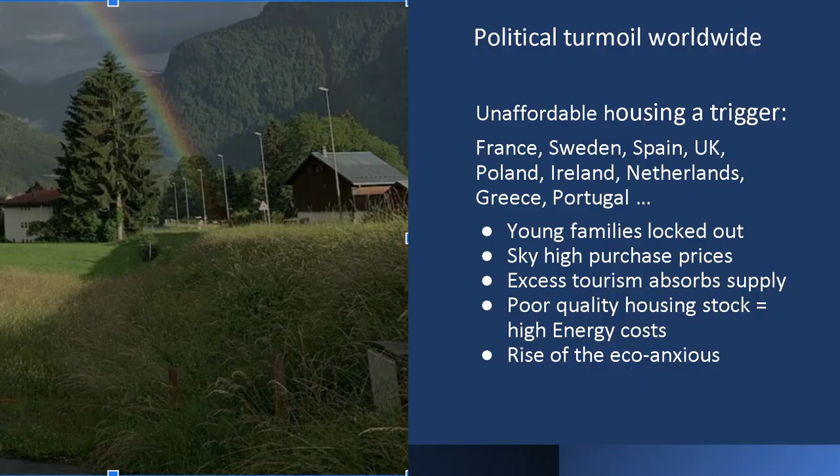So in that landscape, we bought this little house in the middle of this beautiful space in Haute-Savoie, halfway between Chamonix and Geneva. Extremely affordable because it's in a natural off-grid location where there's no other building allowed. This is the town, Samoëns, in France, where down at the bottom, where the town is, it's kind of mega crazy prices, 1 to 5 million euro for a house.

So none of the local people can stay there. Their children can't remain there. They have to commute 30 kilometers in to the village where they were born because expatriates are buying ski chalets. They're sticking in big-ass oil tanks. They're consuming 3, 4, 5, 6 tons of fuel a year, and there's zero appreciation of the damage they're doing, not only to the local environment, but to the planet.

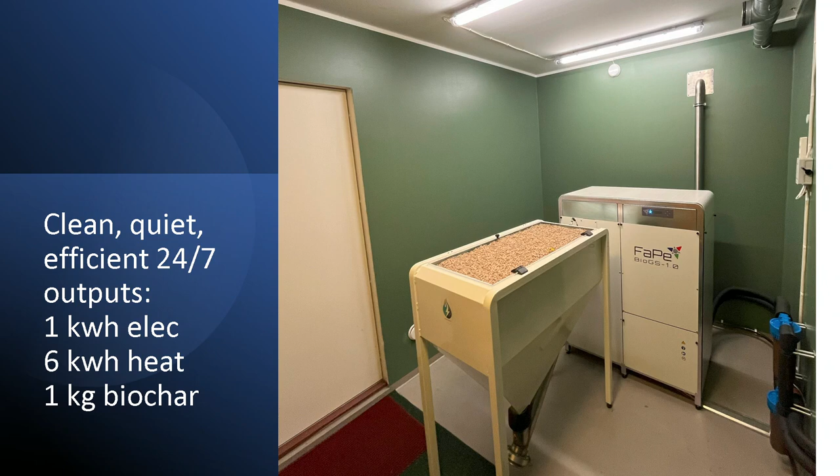So I'll get to the point in a second. This is it. This is a little machine that belongs in the Museum of Modern Art. It's clean, it's quiet, it's inside the house. The exhaust is a plastic pipe. It's quiet as a dishwasher, a noisy dishwasher, but it's still quiet. And it produces 1 kilowatt of electricity per hour, 6 kilowatts of heat, and about 1 kilogram of biochar per hour.

Now, this is the bit I would like you to think about. I'm sure wherever you are from, especially if you're from Europe, there are brownfield sites all over the place. Read any newspaper: the factory's closing down, it's moving to Asia, they're not making this anymore, 1,500 jobs have just been let go. There are brownfield sites everywhere. They might be toxic, they might not be toxic, but the real estate value is infinitesimal. It's a little bit like my field. It's available. The regulations are changing regarding tiny houses. The knowledge is there with passive houses.

It's going to take some thinking out of the box to think about how we can change the equation for these eco-anxious, frustrated people who are going to tear down the house if we don't find a solution for them. Think about solutions like this. Collaborate with municipalities, find the kind of industrial site within range of a city, a town, or a municipality, and get the architects and the builders to get busy and think about on or off-grid generation of power, or a combination.

This system combined with the grid resolves all your peak power problems. So you're actually paying very little for your electricity because you're producing the peak power when you need the peak power, and you're getting the heat all day long, or the cool, as it may happen.

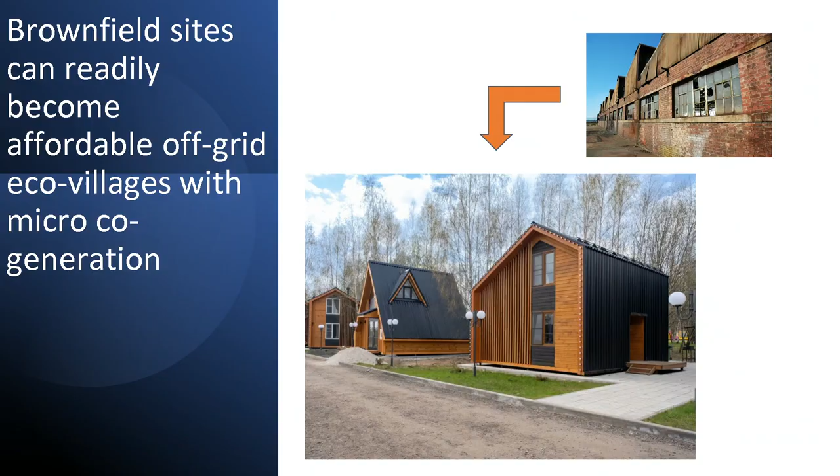Here's a little example of what could happen. So this is the Boekel eco-village in the Netherlands. It's mostly built out. They've just won the SDG awards for sustainable architecture, I think. Sustainable Cities and Communities Award, which is a tough one to get. They won the most sustainable business in the Netherlands award from the Dutch construction industry. Not exactly the friends of the greenies, right? But they voted these guys the most.

So why were they doing it? Because they're talking about affordable social housing with a good biodiversity impact. Now, they don't have the machine we're talking about, but you could imagine with the machine how much more powerful this could be. So it's the dream of municipalities to find homes for the local people which don't turn into ghettos and nasty places and places of crime.

And that's what they're finding: when you create an environment where people can do some gardening, use the biochar, learn about nature, learn about biodiversity, it suddenly turns a corner. So the municipalities are super interested in it. They've changed Dutch legislation to enable these guys to use innovative things that are not quite ready for the market.

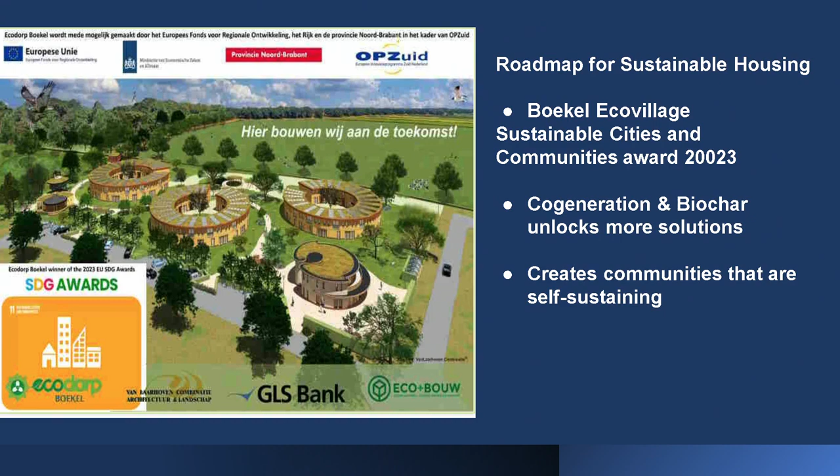So every year we have a festival called the Fête des Possibles. It's in Belgium and France for the moment. It takes the entire month of September, and communities showcase different ways of living. So here we get about 40, 50 guests a year, and we're demonstrating to people the potential of investigating different techniques of being more autonomous. And indeed we are.

And just to conclude, I can tell you as an end user, not a technician, somebody who's had to learn the hard way how to do it properly, that it turns out actually that biochar is the key that we didn't know we needed and that we didn't know we had.

And so it's opened the door to affordability. It's opened the door to maintaining and improving biodiversity. And as we're learning year by year, it's creating extraordinary benefits in soil fertility and growth and potential. And we can see it by the numbers of ordinary people who are coming to our events every year. So this is it. Just want to sort of open that new window to you, if it is a new window. Thank you.

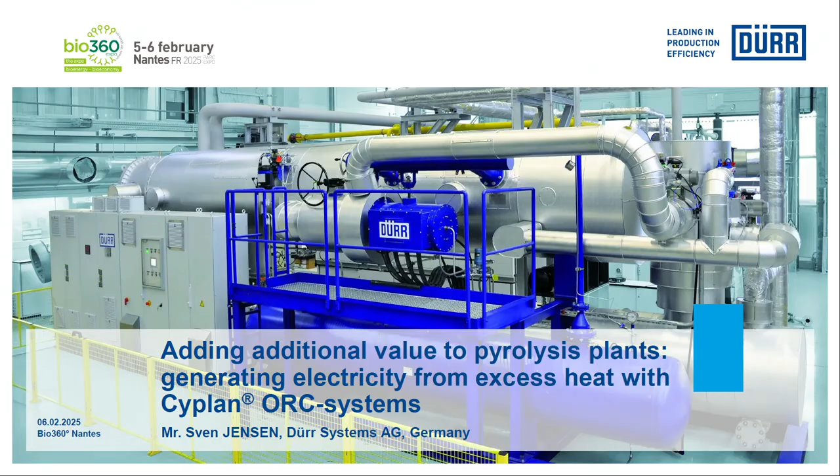So here's a short overview. I will say a few words about the company, then specifically about the technology. That part will be a little bit technical, and then I will specifically share with you how we can apply the technology to the pyrolysis installations, to the pyrolysis industry. In the later part, I have a couple of references, but I'll go over that quickly so you can receive the presentation later and look it up. And at the end, the summary.

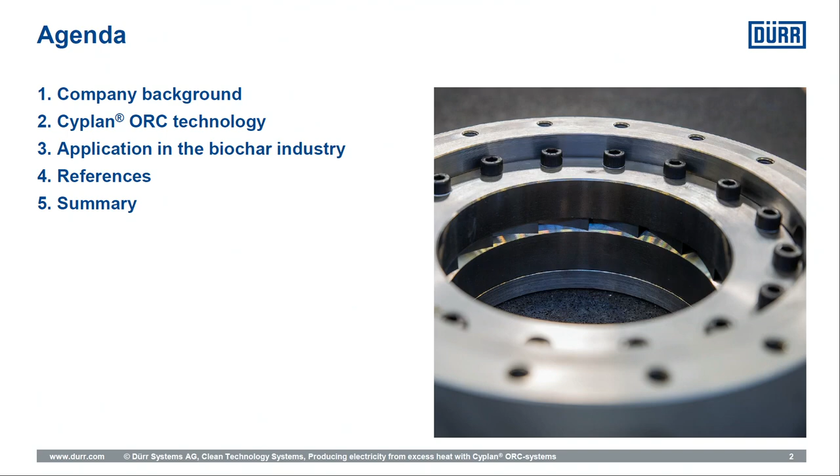The company Dürr is a German-based company in the southern western corner of Germany, in the area of Stuttgart. We are a medium-sized or bigger company, 18,000 employees worldwide, because we do a lot of things. We are a specialized company in machine building and also plant engineering. Here in the middle, framed with a green bar, is the Clean Technology Systems division, and we, with our product Cyplan ORC, are part of that CTS division.

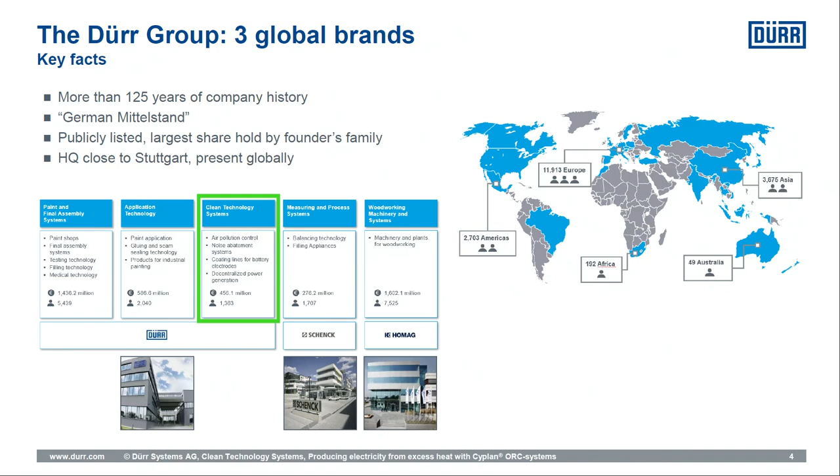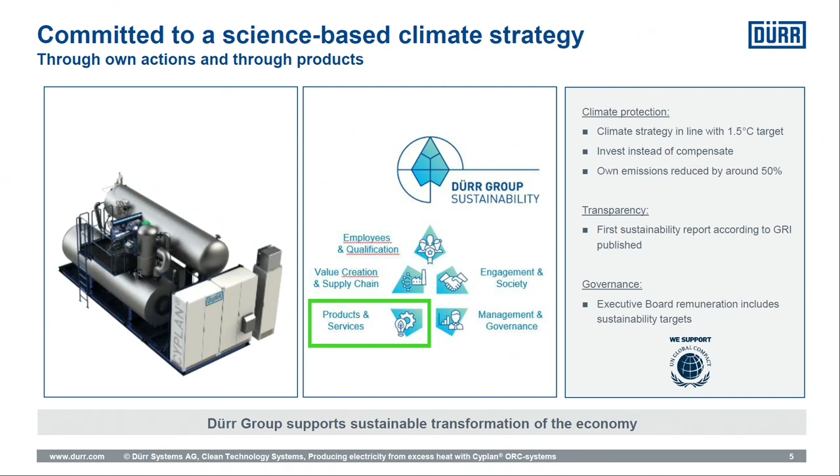Dürr has a big interest in becoming more sustainable. It has a certain policy, and we, with our Cyplan ORC product, are basically an enabler for customers to join this journey of more sustainability.

So what is ORC? ORC stands for Organic Rankine Cycle, and in a nutshell it can be considered similar to a water steam cycle. Technical people among you may know this. This is the cycle that happens in big power plants as well. Thermal energy heats up a media. In big power plants it's just water transforming to steam, and this is sent to a turbine, where in the end electricity is generated.

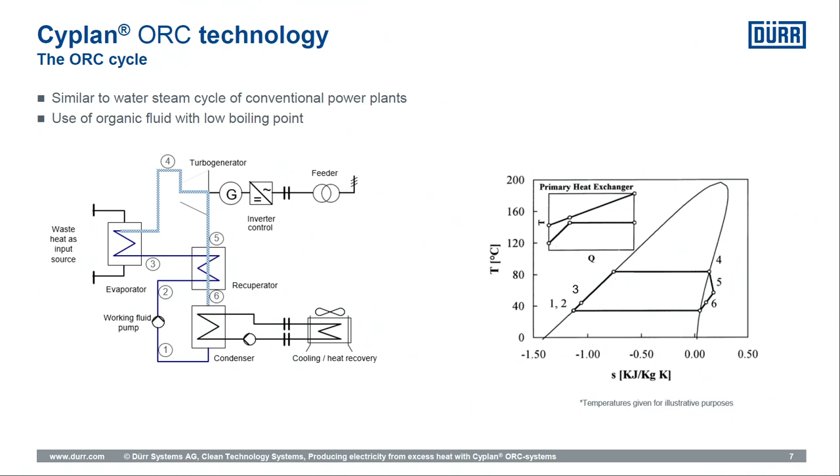We are doing just the same, with the small difference that we are not using water because it has a relatively high boiling point and needs high temperatures. Instead we use organic working media which have a lower boiling point, so we can tap on lower temperatures. But again, relatively the same: we evaporate, we send it to a turbine, this is the place where we generate electricity. Thereafter, we are at low pressure and lower temperature in the ORC media. We need to take out some thermal energy to bring it back into liquid stage, the ORC media, and then close the cycle with a pump. So this is very quickly speaking and explaining what it is about.

The installations, the smaller sizes, look as here in the pictures on the right-hand side - modular units. We try to squeeze everything onto basically the footprint of a 20 or 40 foot container. They are completely assembled in the factory and then sent to the customer and installed there. Because of that, obviously at site there is little cost for installation, and also the commissioning is then quickly done.

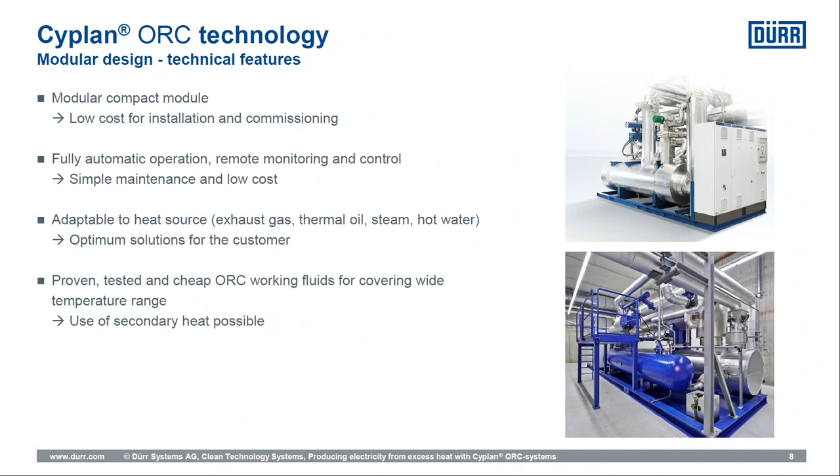We distinguish between high temperature ORC and low temperature ORC. On the left-hand side, from bottom to top, this represents how we receive the energy. When we receive the energy just with hot water, at about 90 degrees or up to 120 degrees, this is the area of low temperature ORC. The cycle is basically the same as explained before.

At the condenser, you have to cool at a maximum low temperature what is possible, and that means most of the times you just have something like a cooling tower or a dry cooler where you push this condensing heat into ambient air at low temperatures, 15 degrees in wintertime, 30 degrees in summer, whatever you can technically establish. When we go to other media, when we receive the heat by means of thermal oil or even hot gas, then we talk about high temperature ORC.

And here we have two differences. Clearly one is the temperature is higher, as is easy to follow. And due to that, we have higher efficiencies in the system itself, roughly double the efficiency compared to low temperature ORC.

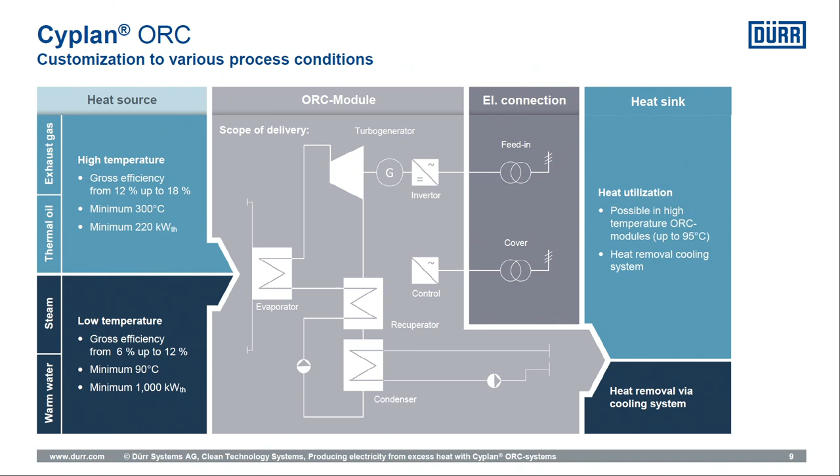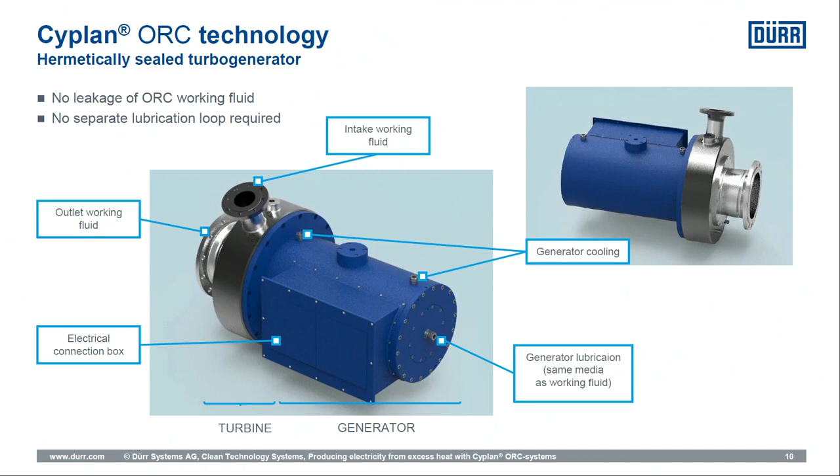At the heart of our technology, there's a turbo generator. I don't want to spend too much words and explanations, only to take with you that this is a hermetically sealed turbo generator, meaning the organic working fluid we use cannot escape, not at this place and not at any other place of the ORC system.

Here is a small picture on the left-hand side. These are the typical sizes we have as modules, so the number stands for the electrical production. 50 kilowatt is the smallest unit, and the 500 kilowatt is the largest transportable unit, in one piece, really the size of a 40-foot container.

When we then talk about the application of the ORC for industry, and clearly not only pyrolysis systems, but it can also be for big industry, steel or any other glass factories, they have a lot of waste heat. Then we are on the right-hand side, and there we rather tailor the ORC solution to the customer needs. So whatever media the heat is available in, we deliver the equipment to catch the heat and then send it to the ORC unit.

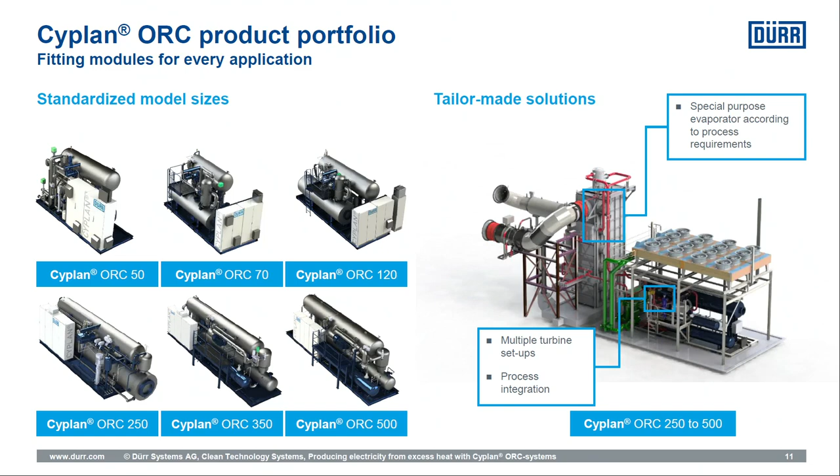So now, what does it mean for the pyrolysis industry or for creating biomass? In this flow sheet, very simple with few boxes, material is received and then sent to the carbonization plant, and then in dotted boxes on the right-hand side is whether there is a filter and gas cleaning equipment or not, depending on the mode of the pyrolysis. In the end, the exhaust gases go to a stack.

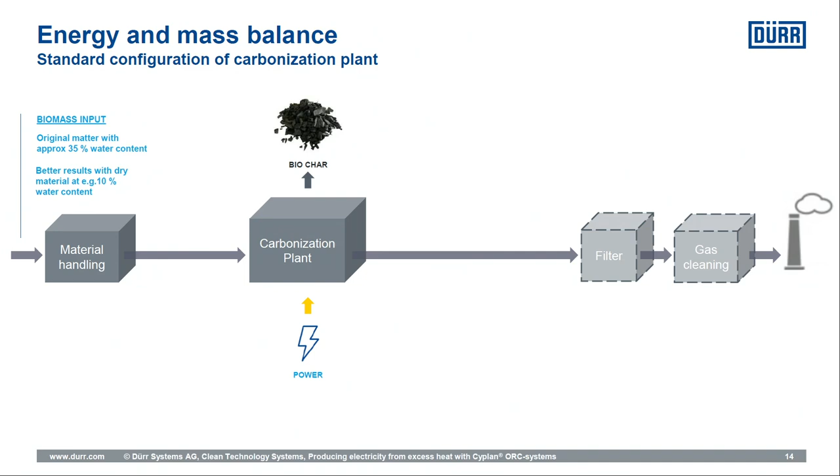I've developed this example on the basis that we receive biomass, so wood chips in this case, with a water content of roughly 35%. However, most or many of the pyrolysis plants work better if there is a lower moisture content in the biomass received or introduced into the reactor. So if desired, there must be a kind of drying system in between.

The ORC typically is then at the tail end. So after the pyrolysis and the combustion of the syngases, we have a hot flue gas, and this is exactly where we want to place the ORC unit. We take the hot gases directly into the primary heat exchanger and run the cycle as explained before.

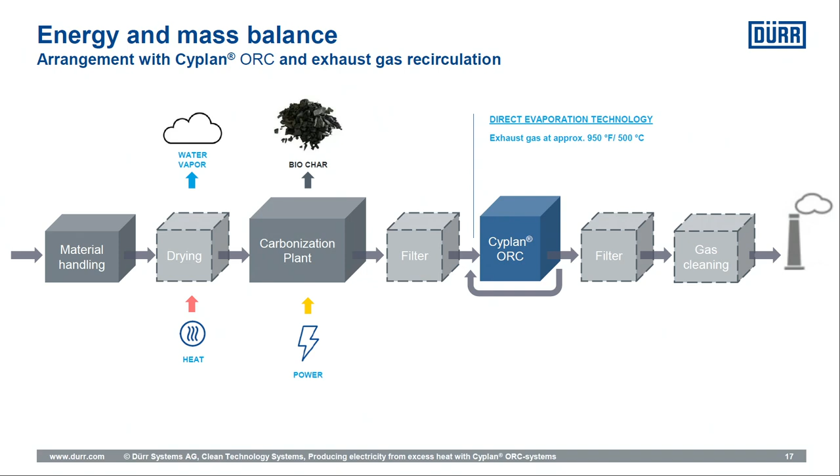So what we do is we produce the electricity again as explained, and by this rough example, with this input or a typical plant, the plant itself from beginning to end consumes roughly 30% of the electricity we generate. So the remainder, 70%, is basically free for use, for any neighbor who is there, or for sell to the grid.

Similarly, as I explained before, we can run the ORC as a combined heat and power unit. So we have this secondary heat, and part of that we funnel back to the drying unit. In that sense, we really close the cycle and make it a very integrated system, using the temperature up to 90-95 degrees for drying the feedstock in the front.

And again, clearly depending on the water content of the feedstock, there is still temperature or thermal energy in surplus, roundabout in the range of 50 to 70%, which again can be used externally or sold to any district heating network.

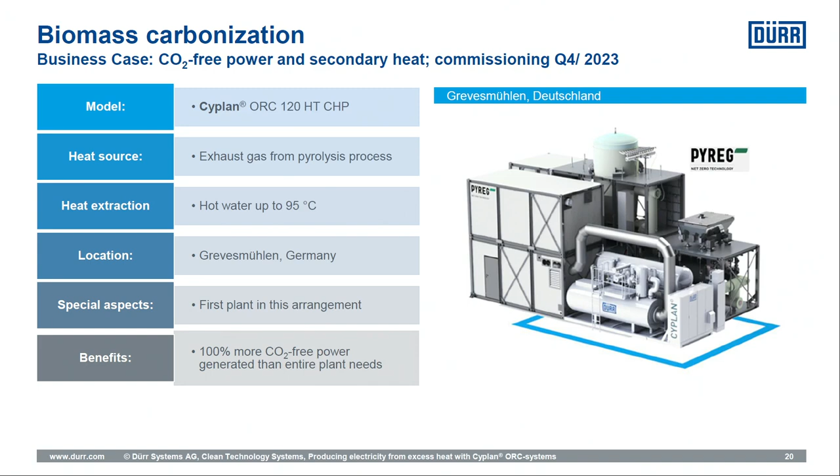So we are lucky that we could already convince some of the pyrolysis producers. We have a project together with the company PYREG. It has been installed in Germany, in the north, and running for roughly 1.5 years. So 2 lines where we have added an ORC 120 to a PYREG 1500.

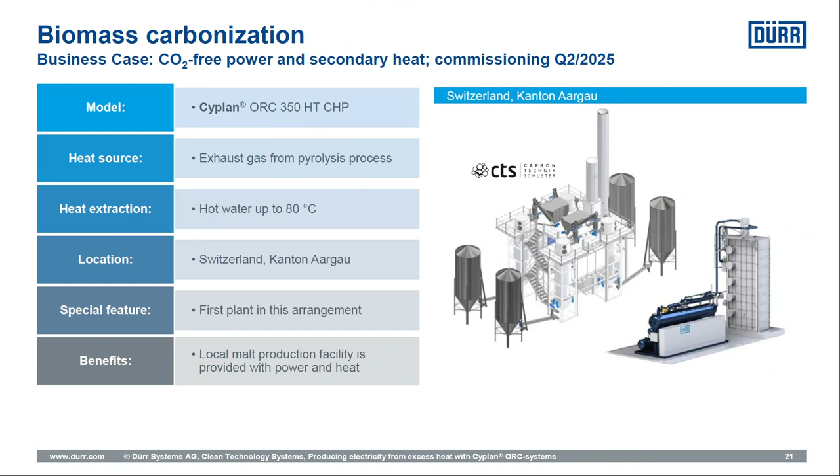Then another German manufacturer, CTS Schuster, is building a plant in Switzerland, a bigger unit with different technology. Here we also have a bigger unit, which looks more like the illustrated picture on the lower right-hand side. This is the ORC composed of a standing evaporator and the ORC base module, but the concept is the same. We take the hot flue gases.

Then we are working on a project in the USA. Due to certain circumstances, it's becoming more and more interesting for US producers to take care of their waste heat. So we are very lucky and proud. This unit is in the final stage of being manufactured here in Germany and then shipped over in the month of May.

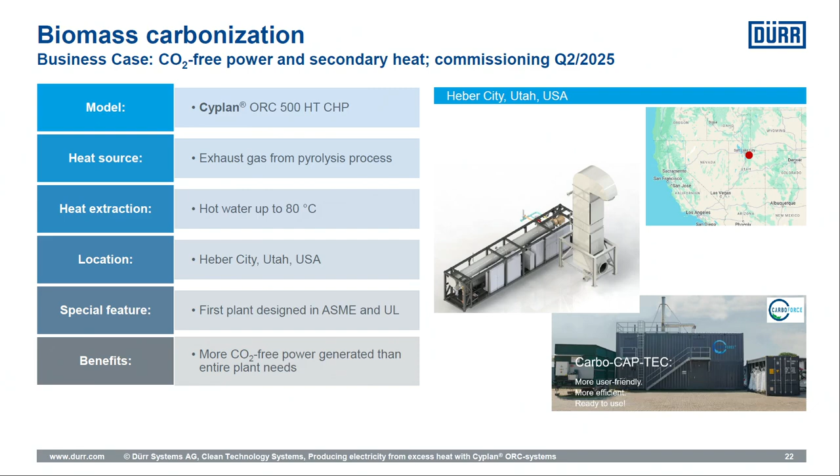And then another one, again with a partner I forgot to mention earlier - the project in the US is with the German company Carboforce. Finally, the 4th project, which is very close, is with the company NGE, also present here, again in Switzerland. Different technology on their side, adaptation on our side, but the concept is basically always the same or similar.

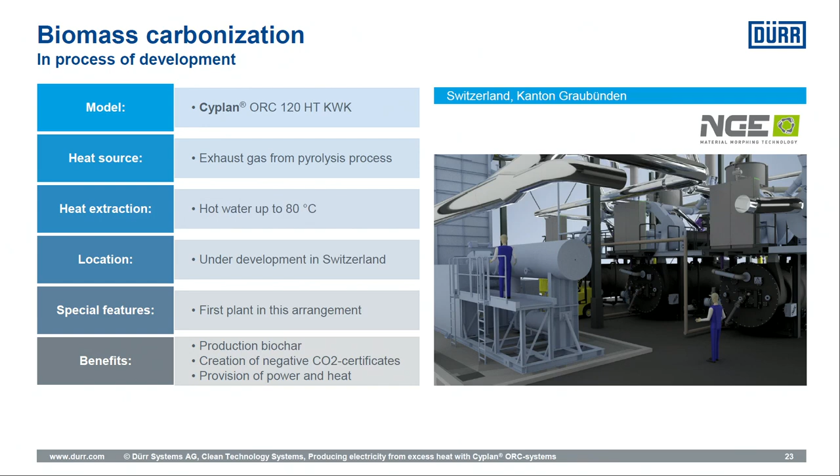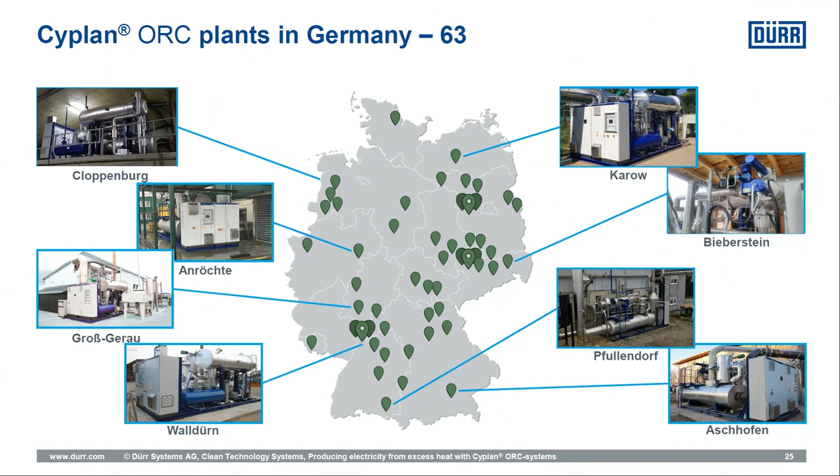Thank you. So here are some more references. Overall, clearly we are a German company, and most of our installations are in Germany. But we also have a couple of installations outside of Germany, worldwide, where for certain reasons we could convince the customer to pick us.

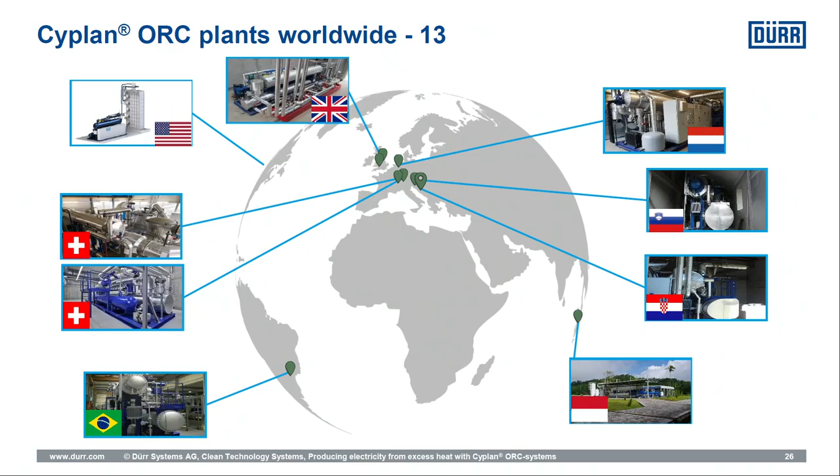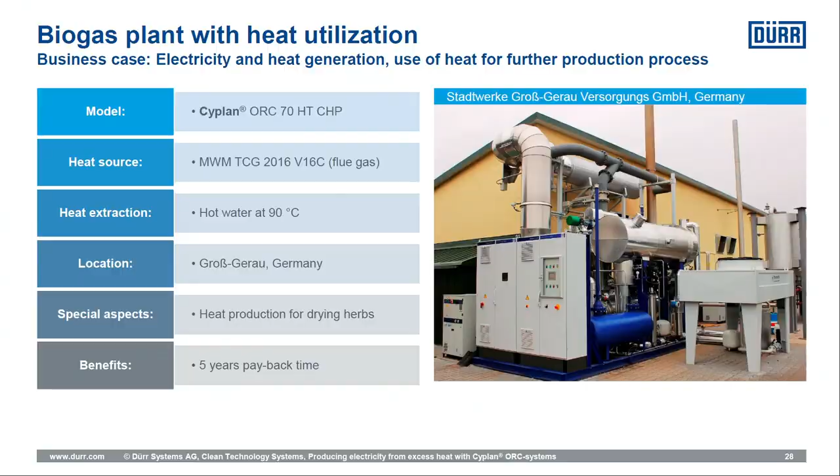Then here are more pictures, I'll flip through quickly. We have a lot of installations in the biogas sector, which might be interesting for other people here in the back of the hall who aren't sitting here. Also larger units where we have the transfer with thermal oil, when there's a boiler, just a biomass boiler, heating up the thermal oil, and we receive it at a temperature of 300 degrees, for example.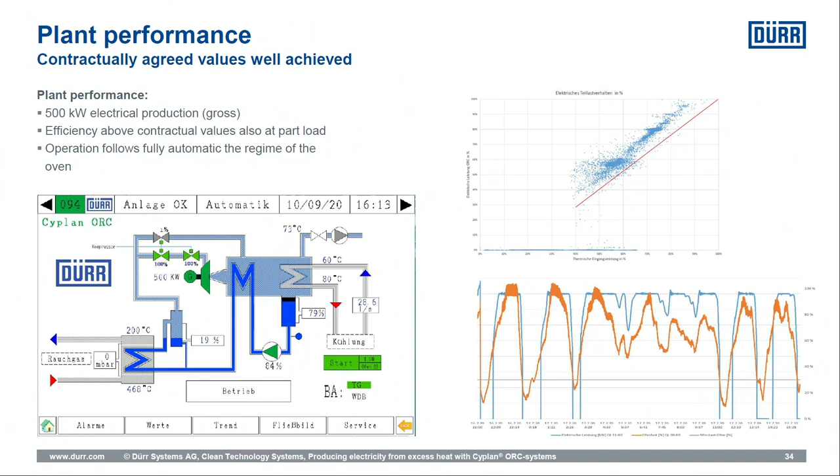Right, then I'm at the end. Just a short summary - what are the big benefits of the ORC? You can produce electricity on site, CO2-free electricity, because the CO2 burden is not connected to the waste heat and therefore not to the electricity.

I didn't talk about that point a lot, but we are using natural hydrocarbons as ORC working media, so no refrigerants. That means we have a low GWP, global warming potential, and also we think we are safe for whatever development might come in relation to regulation of refrigerants.

Yeah, clearly with the electricity generated, you don't need to buy it from the grid, so this is the main point of saving. In case of the pyrolysis plants, of course, as well, the electricity is CO2 free. If you buy the electricity from the grid, there's a certain CO2 package coming with it, and normally with the certification process you need to deduct. So whatever you have spent in CO2 for your production or for carrying the biomass to your plant, and with producing your own CO2-free electricity, you basically can increase or improve your case here.

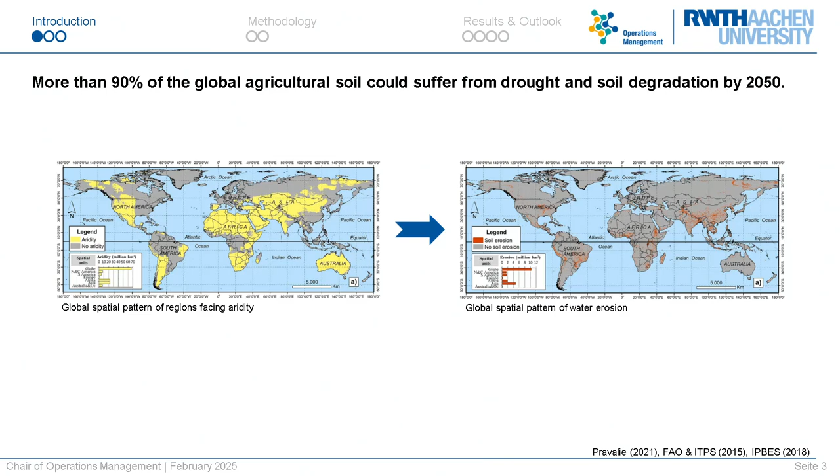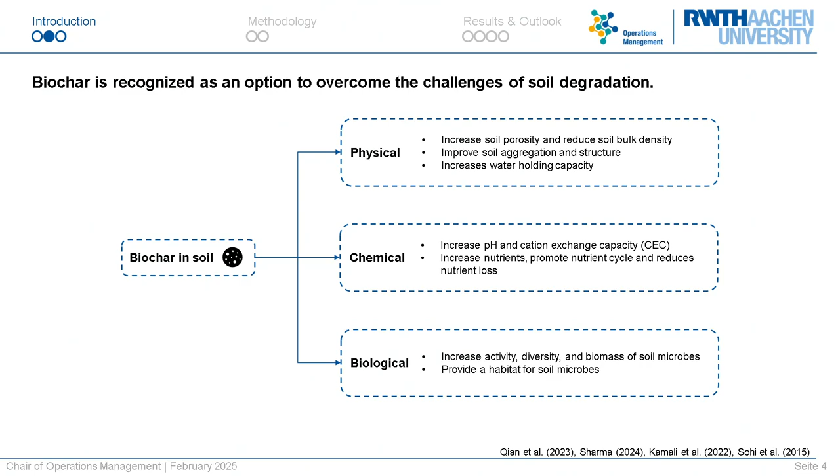But fortunately, biochar is recognized as an option to overcome those challenges, because it has an impact on several physical, chemical and biological soil properties. For example, it has a very high pH value, so it increases the pH value, and it also has a very high specific surface area, and therefore it works like a sponge, and it holds water and nutrients much better and much longer, especially for very bad soils. So especially in regions where we have very poor soil structure, biochar can really enhance the soil structure a lot, and therefore improves the yield.

But in the current literature, there is much research done about this, but what we see is a very wide range of the impact that biochar can really have on the crop yield. So we have many researchers that even show a decrease in crop yield where we added biochar to the soil. A meta-analysis shows that sometimes the yield was less than half compared to the field without the biochar, because the carbon content was already very high in this region. And on the other hand, we have researchers that showed an increase in crop yield of more than 300%.

So here I just took 5 little examples where we can see the impact on the yield. For some researchers it was -18%, -24%, and sometimes the yield was more than doubled. The reason for this is that those studies were done in different regions in the world. They took different biomasses for the biochar production. They implemented a different amount of biochar. They've been in different climate classes, and they planted different crops.

Therefore, it's very difficult or almost impossible to compare from the current literature how the biochar really influences the crop yield. Therefore, our aim was to get a strict value chain, so to have a global comparison. Okay, we have this biochar. How does this biochar impact which crop? Therefore, the research gap we faced in our research was where in the world we have the high potential for biochar as a soil amendment.

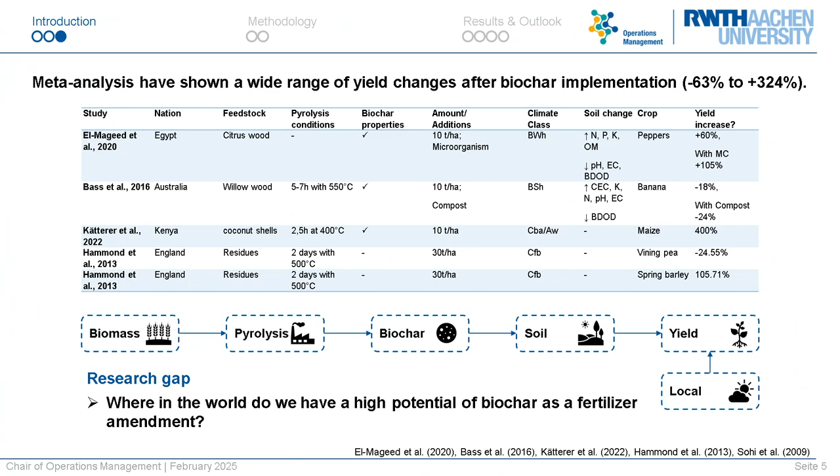For that, to start with, now it's getting a bit theoretical, but just to explain the methodology we used. There are satellite data, and with those satellite data we know the soil and the climate characteristics everywhere in the world. So we know, for example, the pH value here in Nantes, in Paris, in Berlin, in China, everywhere, as well as the carbon content, the sand content, the silt content. So we can analyze all that with satellite data.

And we took those data, so we took the maize yield, so we don't know this only about soil characteristics, but also, for example, for the maize yield for climate data, and we used those data with a raster of 0.1 by 0.1 degrees. So in total, we had 6.4 million data points, and for each data point, we knew several climate and several soil data, and we also knew the maize yield, and therefore we used a supervised machine learning algorithm in order to better understand the correlations between those input data of the climate, the soil and the fertilizer data, and the maize yield as the output.

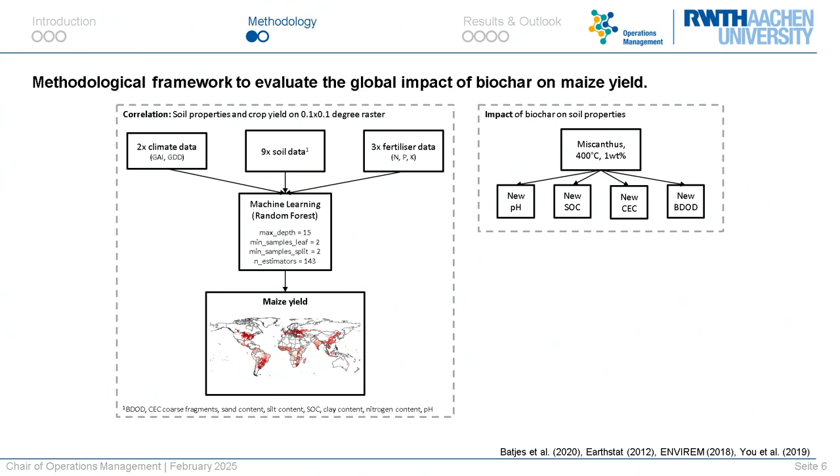So in our first run, we tried to find the correlation between those input data from the soil and the climate data and the maize yield. And then in a second step, we asked the model, okay, now let's assume we would implement biochar everywhere. How would the soil properties change after the addition of biochar, and then in the second run, with those new soil data, how would the maize yield increase or decrease, and how much does it increase or decrease, in order to get a global map which can show us really the impact of biochar on the maize yield.

I will get now a bit more, because I think you can see it very properly, but I just want to explain to you quickly, because there's no really sophisticated model that shows the correlations between biochar and the soil characteristics. So we work very closely together with our department from soil science. So we linearized the model of 14 studies in order to find the linear correlation between the pH value, for example, the cation exchange capacity, the bulk density, and the soil organic carbon content of the biochar and the soil. So we found these 14 researchers that measured the impact of the biochar on those soil properties, and then in the end, how we used it in our model.

We said, okay, the pH value that we have afterwards, after the biochar implementation, was the one before, plus this factor multiplied with the pH value of the biochar minus the pH value before. So this is just the linearization that we took for our model. The biochar we assumed was from our other department, where we used our laboratory data from Miscanthus biochar that was pyrolyzed at 400 degrees for 3 hours with those input data.

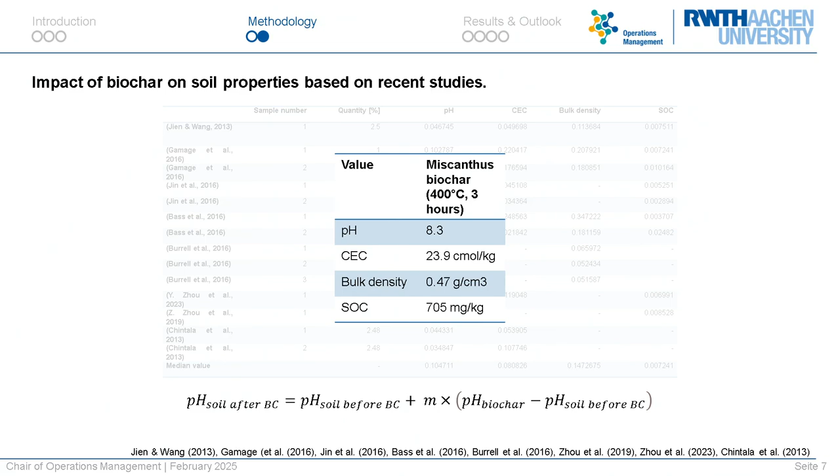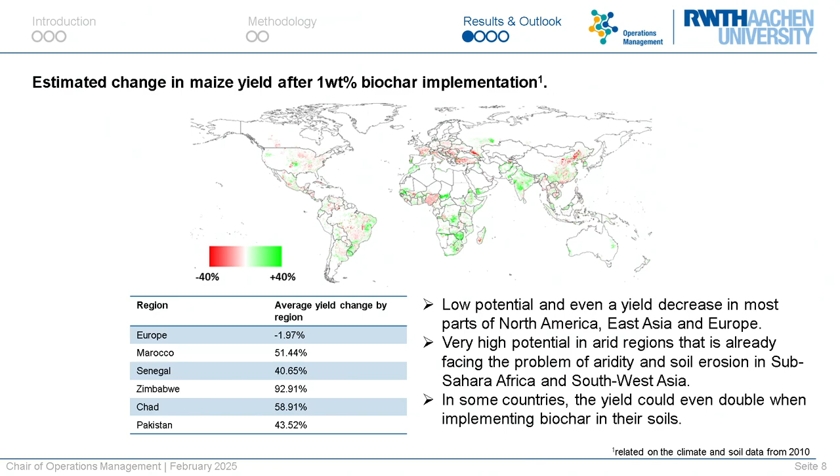But this is very different, especially in arid regions in sub-Saharan Africa or in South-West Asia. There we see a very high potential. We can predict a yield increase by 50 to 100%, which is already validated. So we can really see that in those arid regions, biochar can really enhance the crop yield much more than it does here in Europe or in Germany.

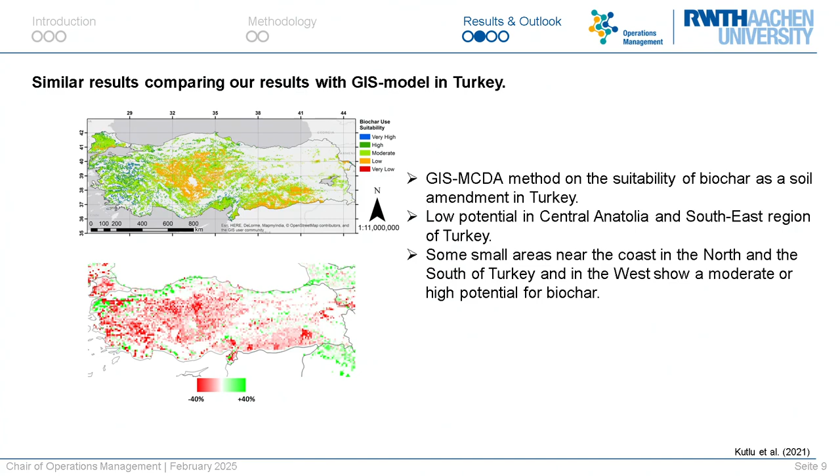We also validated our results with field studies from China, Zambia, Germany, Australia, and Burkina Faso. What we compared for each study is how much biochar was applied, and what was their result, what impact the biochar really has on the maize yield. We see for 6 out of 8 studies that the results of our forecast were quite close to what the field study has shown.

Maybe just to sum up or to conclude our results. So we developed a model with a random forest machine learning algorithm to find the correlations between climate, soil, and fertilizer data and the maize yield. The potential for biochar in agriculture in Germany and Europe is very limited, but it might develop in southern Europe because of soil degradation that is already going on there, and desertification.

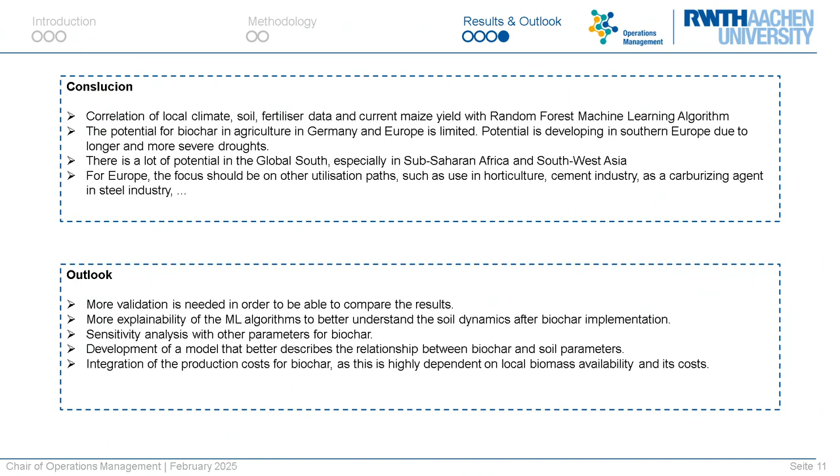But what we would need in order to use this model more is more validations. We would need bigger fields and more validation points to compare the results better. We need more explainability for the machine learning algorithm. We need a sensitivity analysis for some parameters, and the model that we have developed for the correlations between biochar and the soil properties is also still under development. There's a lot going on there in the research field, and we also need to integrate the production cost rather than just the potential of biochar as a soil amendment.

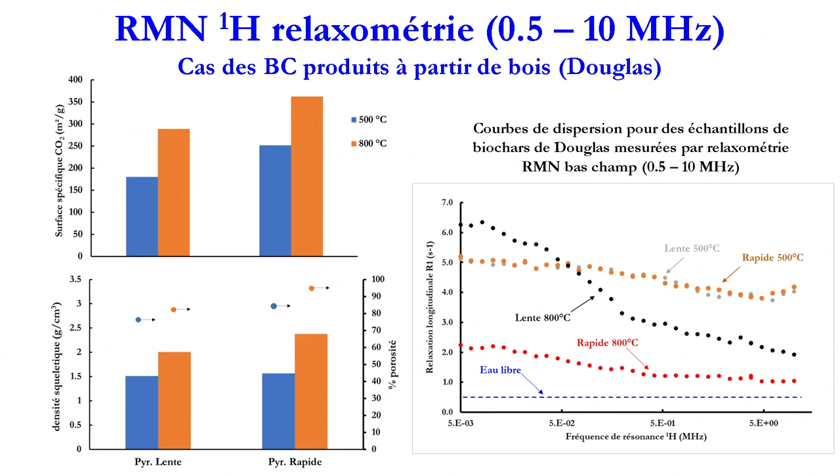Un autre point sur lequel on a travaillé, c'est la production de biohuile par pyrolyse rapide. Donc, on est parti sur une technologie qu'on a disponible dans notre laboratoire, qui est un lit fluidisé à 500 degrés, à 1 kg d'injection dans le lit de sable.

Le défi était de pouvoir récupérer la phase lourde de biohuile, donc de mettre au point une technique de condensation étagée. Lorsque vous avez produit des biohuiles de pyrolyse, vous avez en grosso modo 50% d'eau, 50% de phase lourde. Donc on a joué sur la température de nos condenseurs pour essayer d'avoir une phase lourde à peu près à 20% en eau, ce qui présente un intérêt assez intéressant en termes de valorisation. On a eu 30 à 40% de biohuile lourde, avec 62% de carbone et environ 30% d'oxygène pour un PCI de 25 kJ par gramme.

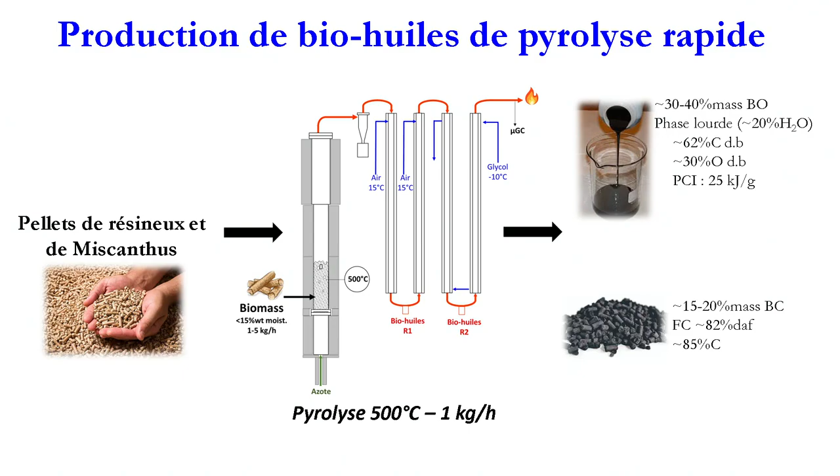Et le rendement en biochar était entre 15 et 20% massique pour un carbone fixe de 82%, pour 85% de carbone. Voilà, donc je vous remercie pour votre attention.

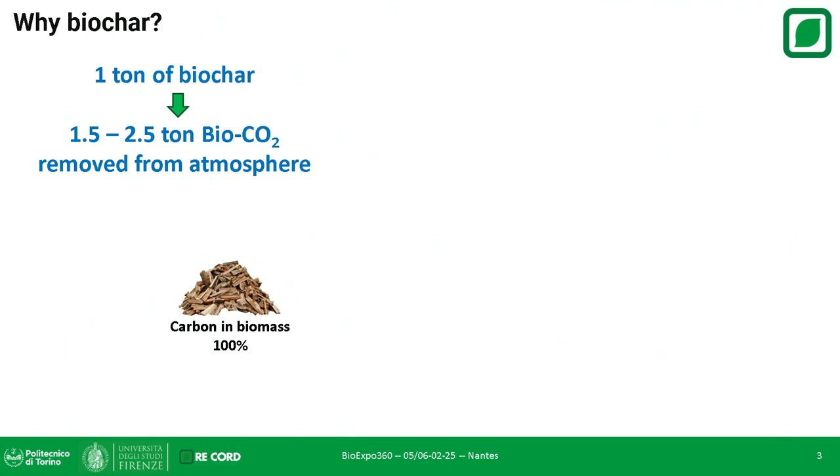So why biochar? Everyone knows here, so I'll be quick on this: the advantage is that we will produce a form of carbon that is long-lived, very stable, compared to the labile carbon that we get from anaerobic digestion processes as such. So there are possibilities that open up to credits and carbon sequestration by applying this process to a bio-waste stream.

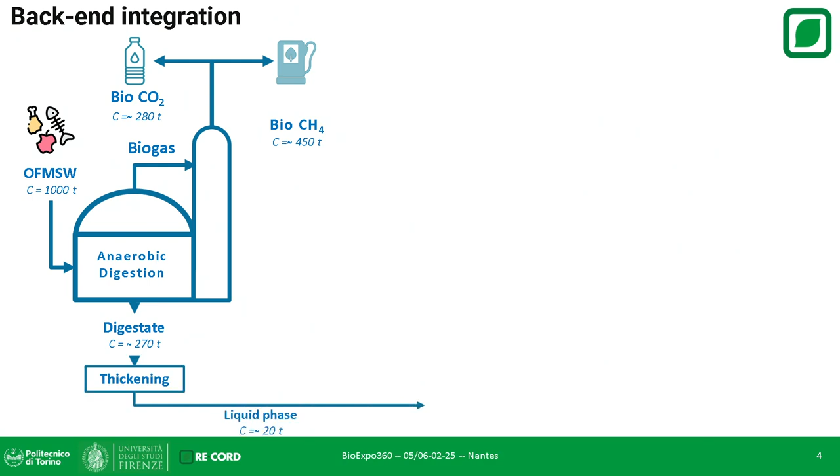So how does it play out? We have our very simple, straightforward anaerobic digestion system, so we produce CO2 and methane. You can either separate them or use it as biogas. You get your digestate from the system, and after the thickening phase you get the liquid, so straightforward stripping, and you recover some ammonium sulfate. Then with the solid phase you get out a first potential product, a fertilizer product, CMC5. Or if you add some green waste and go for composting, you can go for CMC3, classical compost. What happens next?

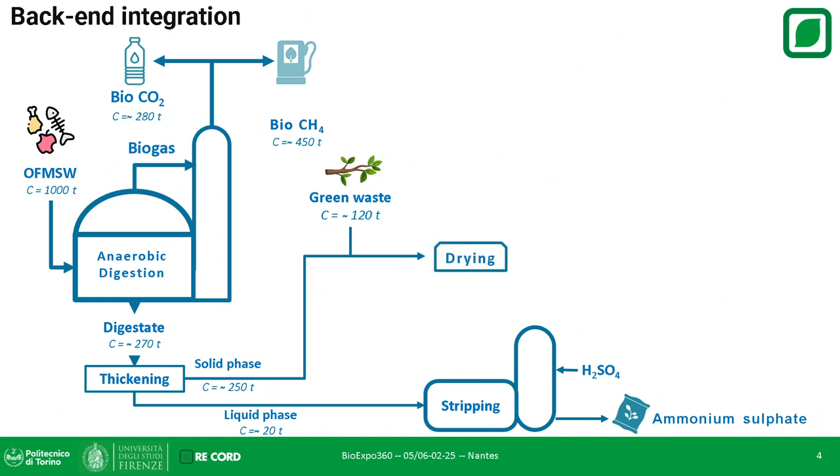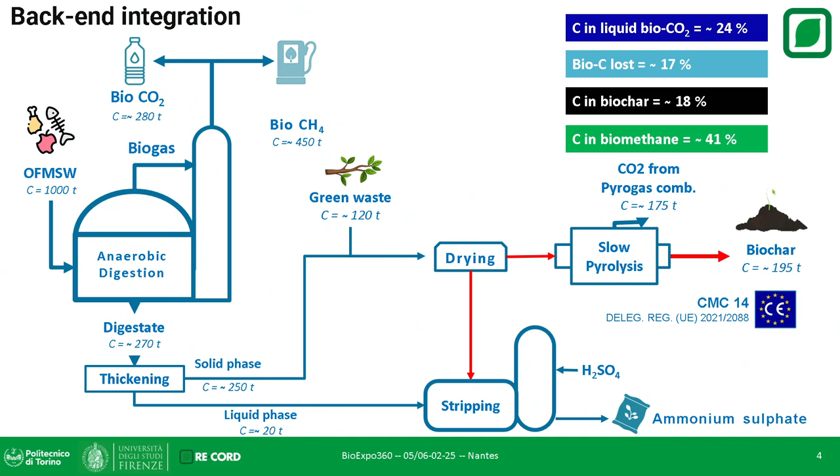If instead of going for composting we had a dryer and a slow pyrolysis system, you can get out biochar, which again is another fertilizer product, CMC14, with clear advantages in different use cases. So possibilities are there for different uses, and one of these clearly is that the stability of the product means it's no longer just used in fertilization of fields, but can be used in carbon sequestration applications.

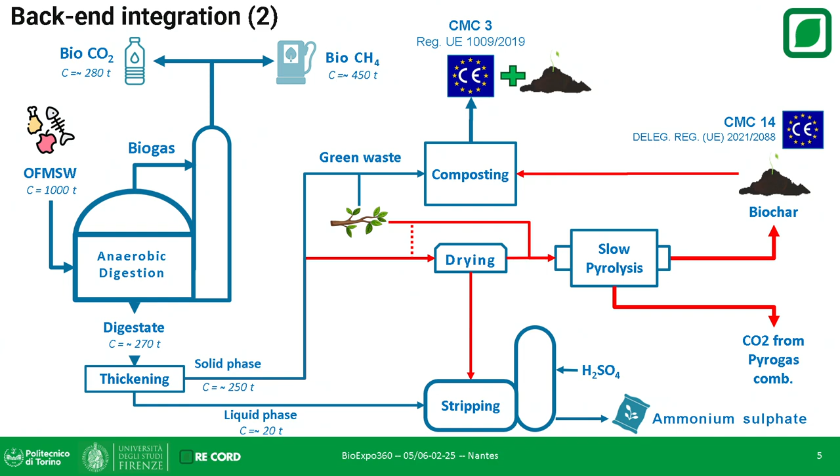Another possibility with the back-end integration is that you might leverage the properties of biochar and add it to the composting pile and get a compost-enriched biochar, or co-composted biochar. Of course, this is just a flow chart. Then you have to make the things work when it comes to mass balances, clearly. But again, this is another possibility that opens up by the back-end integration.

Alternatively, we can look at the front-end integration. Again, on the right-hand side we have our standard process and possibilities, so either CMC5 or CMC3, not both together, clearly. And a biomass-operated slow pyrolysis unit producing a biochar that can be fed into the anaerobic digestion system to improve and boost methane yield under certain conditions, of course. What you get is either a CMC5 enriched in biochar or a CMC3 enriched in biochar, which again opens up possibilities and provides additionalities.

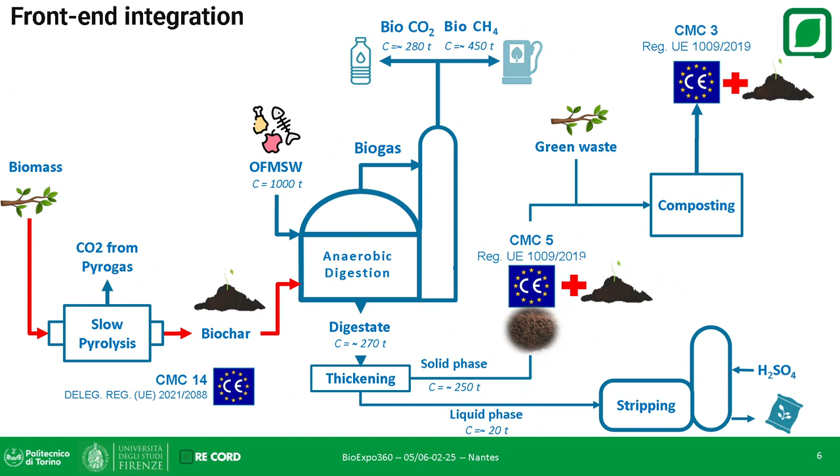One of these, of course, is carbon storage and sequestration. The other is, for the CMC3 for example, that you improve the composting process, so you get some benefits if compost is the process you're looking at.

Let's see briefly these two case studies, in which pyrolysis was first authorized in Italy in a process that treats bio-waste, so not a process operating on clean biomass as we know it. This plant was authorized in 2024, and operates on roughly 40,000 tons per year of bio-waste separately collected from local municipalities, plus a couple thousand tons of green waste, so shrubs and prunings from trees on the streets. Of course the process in this specific case produces biomethane, which is reinjected into the grid, CO2 which is sold separately, biochar, and a technical grade ammonium sulfate.

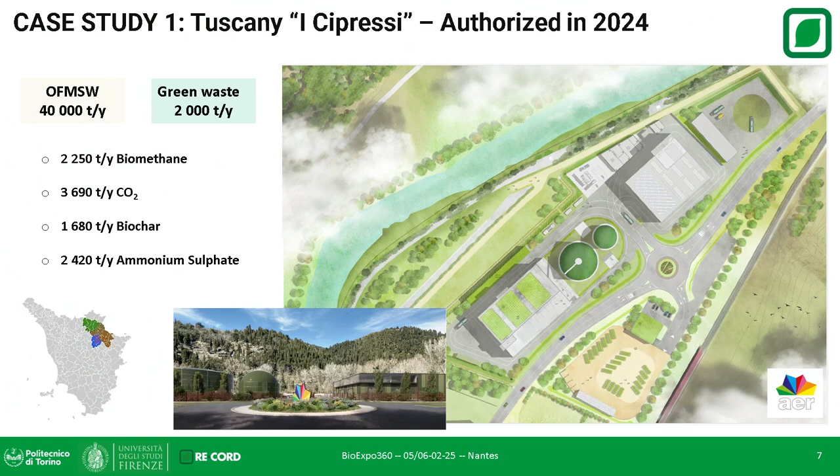It seems very simple in terms of a process flow chart, but the devil is in the details. When it comes to authorizing such a plant in our country, legislation plays a role. Given that you're processing bio-waste rather than clean biomass, legislators ask for modification to this kind of process. So what happens here is that, merely due to regulatory constraints, you have to add a pyrogas cleaning step before oxidizing the pyrogas.

As you know, the vast majority, the overwhelming majority of technical pyrolysis installations burn off all the pyrolysis gases as they are. A limited number of installations condensate the pyrolysis gases to get out some liquid, but the vast majority just burn them straight. Now in Italy, due to national legislation, statutory obligations, the majority of regulators do not allow that, or allow it only under the condition that you treat this pyrolysis section as an incinerator. They make this equivalence, so you have the burden of all the analysis that you'd need to apply and deploy to an incineration plant.

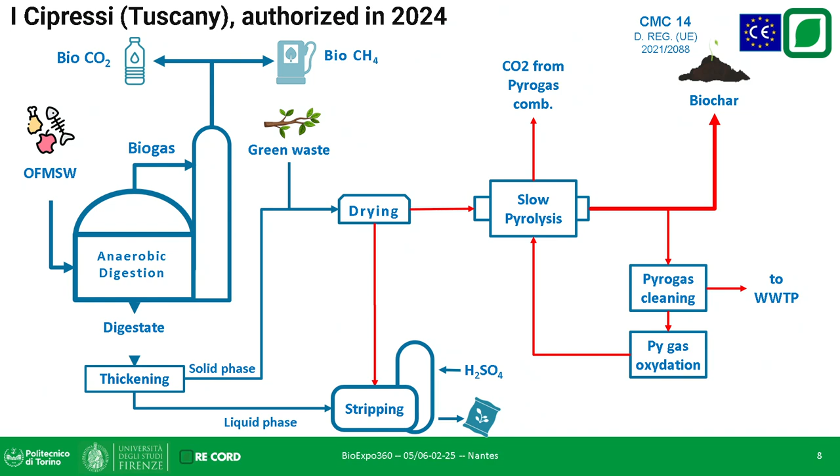So in order to avoid this, you have to purify the pyrolysis gas stream. Purification for them means removing the organic compounds, leaving just the clean syngas available. This is why in this specific project, authorized for construction in 2024, we needed to add this pyrogas cleaning step.

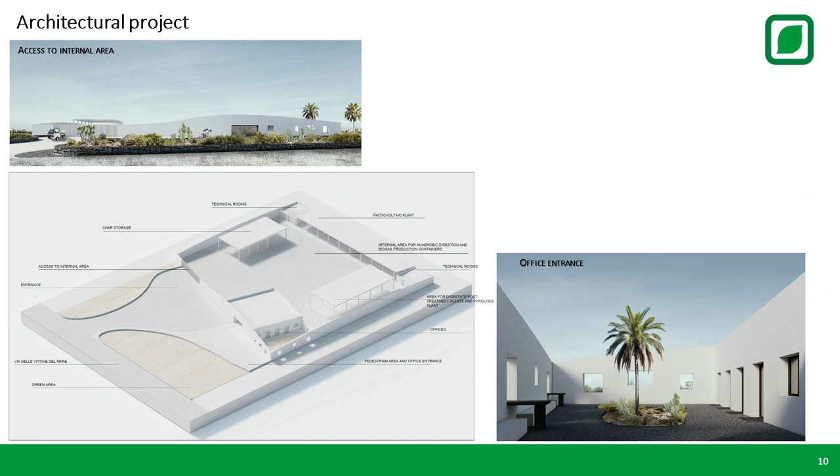On a different take, for this other project that we've been doing for the municipality, this small island of Pantelleria, located in the middle of the Mediterranean Sea between Italy and Tunisia. Roughly 10,000 people live there all year round, so it's a very, very small project. There's a very large fluctuation in seasonality of production of green waste and bio-waste due to the influx of tourists, so we had to be creative in addressing this specific need.

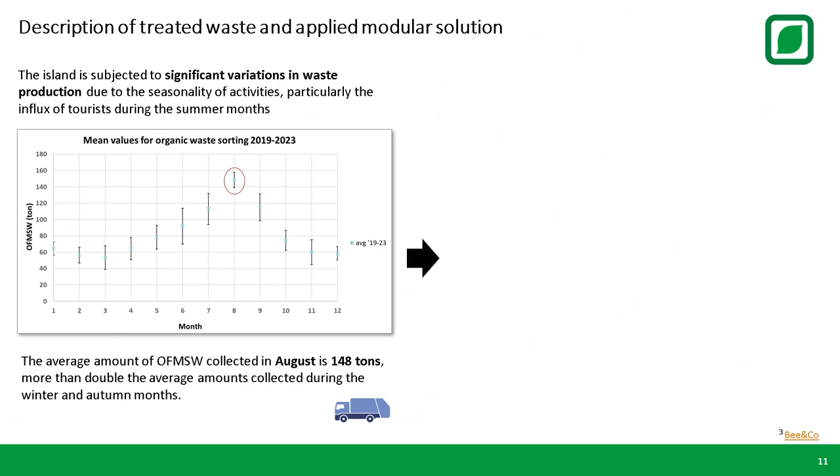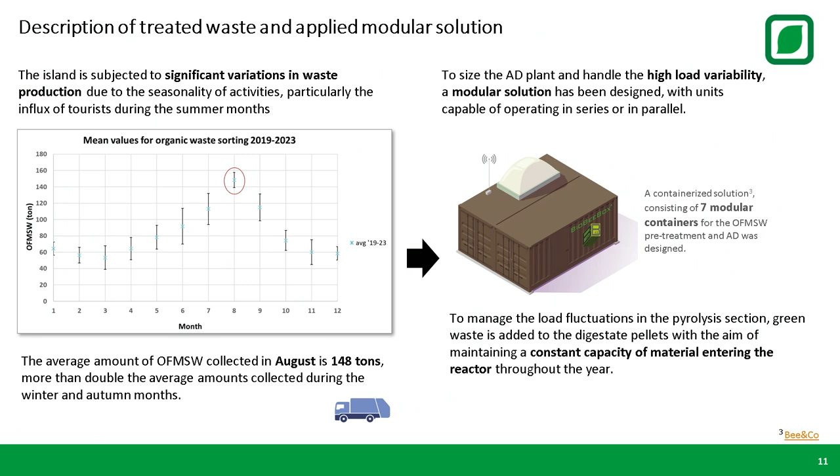We had to resort to a modular anaerobic digestion plant, made in France by a very nice company, Bee&Co. In order to adjust for the fluctuation of this load and make the pyrolysis section work as constantly as possible with a smoother flow, we had to add some green waste to make up for the fluctuation in bio-waste. So to have a good anaerobic digestion system that can handle the fluctuation in bio-waste with modularity, we use green waste to make up for that fluctuation and keep the pyrolysis unit running at a constant load all year round.

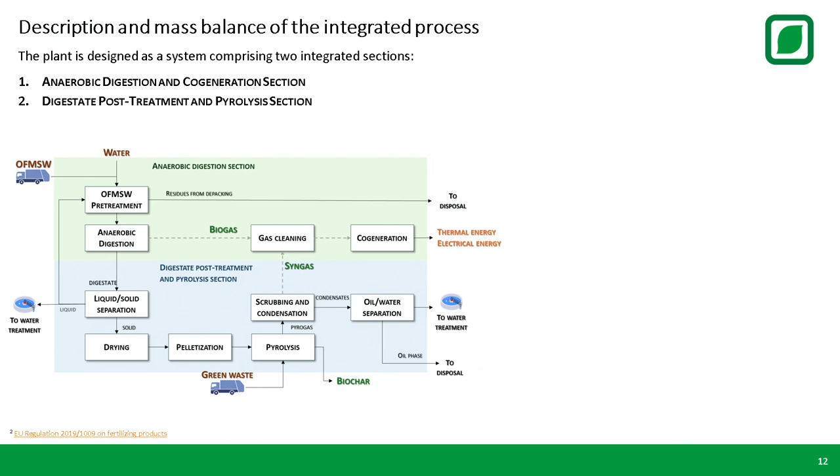Again, you won't see much changing. Still, we need to add this scrubbing and condensation step on the pyrolysis gases, which in this specific case are not burnt directly but are sent to a cogeneration system. Due to local constraints, the whole system has to run on electricity, and a significant amount of PV panels were installed to make up for the consumption. The separated phase can then go to the wastewater treatment plant, which is nearby.

The plant is expected to have an overall capacity of up to 1.3 kiloton per year of organic fraction of municipal solid waste. The makeup green waste is roughly 100 tons per year. This plant is expected to come online in 2026 on the Isle of Pantelleria.

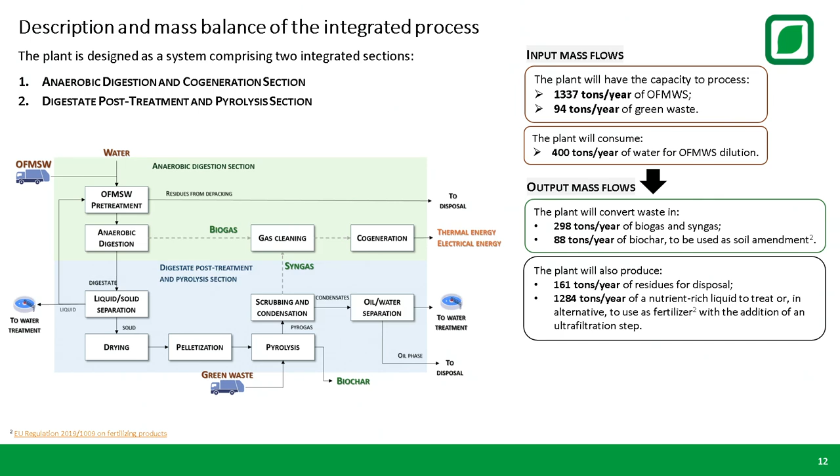The product will be biogas and syngas, used in co-feeding in the cogeneration section engines. A peculiarity of this system is that the drying stage of the digestate will use a heat pump dryer, in order not to have stack emissions, but instead treat the water in the nearby wastewater treatment plant.

Concluding this brief overview, biochar has the potential to turn bio-waste digestate into a much more stable and durable carbon-negative soil conditioner. Roughly half of the carbon that goes into the biomass can end up in the biochar, in a much more stable, long-lived form.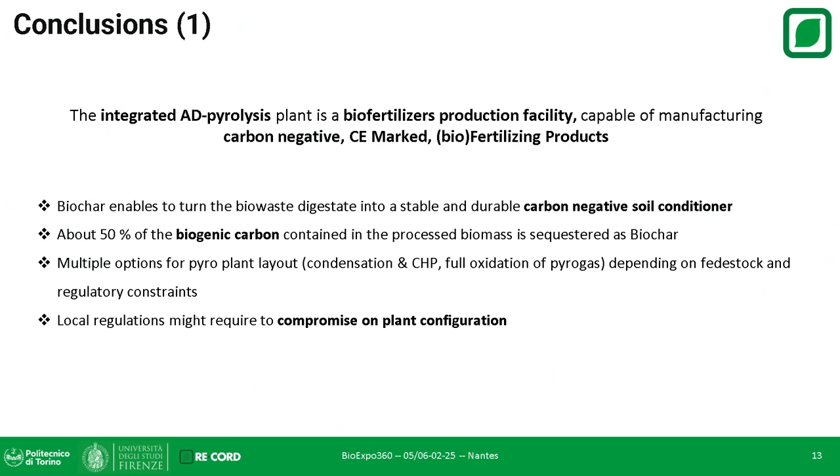There are multiple options for the pyrolysis plant layout, such as condensation and cogeneration or full oxidation of pyrolysis gases, depending on the feedstock and local regulatory constraints. Regulation might require compromising on plant configuration, and this is absolutely dependent on local conditions.

When integrated at the back end, along with composting, biochar can decrease nitrogen emissions in the stack, increasing composting speed and product quality, so you get some value out of it. One of the problems with bio-waste digestate is that its value is practically nothing, zero.

Biochar can change this economics, adding value and decreasing cost due to improved composting speed. When added to the back end instead of composting, you have less burden of civil works, since the composting phase is civil construction intensive. You increase product value much more, since biochar retails for at least a couple hundred euros per ton.

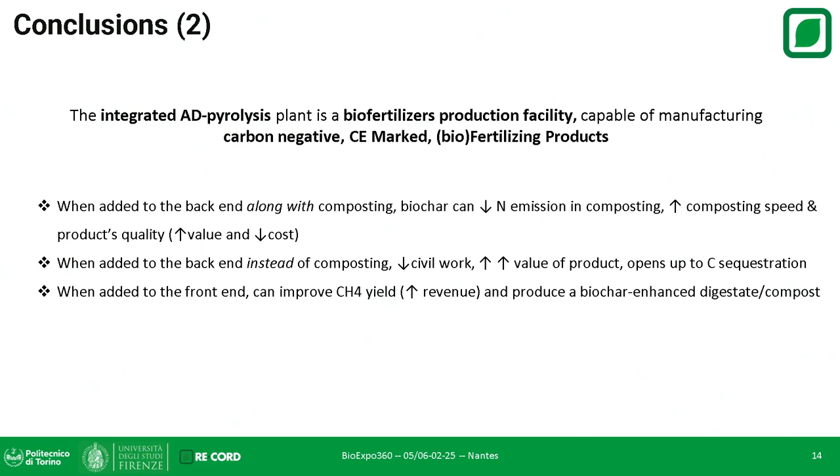Conversely, as mentioned, digestate value is practically nothing, and of course you open up to carbon sequestration. When added to the front end, you can improve biomethane or methane yield and thus revenues, and produce a biochar-enhanced fertilizer product at the end of the system, either CMC3 or CMC5.

Thank you much for your attention, and I'll leave the floor to the next speaker.

Thank you everyone for still being here at the end of a second long day of conferences. I am going to be a lot less technical than my predecessors. I am here to talk about carbon strategy.

I work with Geca, and what we do is accompany project developers, especially in biochar but also in bio-oil, and any waste treatment through thermal processing, to get carbon sequestration and carbon credits. We advise on technical issues such as choosing the right machinery, the right equipment, finding the right recipe for biochar, and then we advise on developing the carbon strategy.

On the carbon side, which is the team I work in, we help find the right narrative for your project. We take care of writing the project design documents and the LCA. We only ask you to collect the data in order to get the certification. We can also help you choose the right standard, because this is a tricky part.